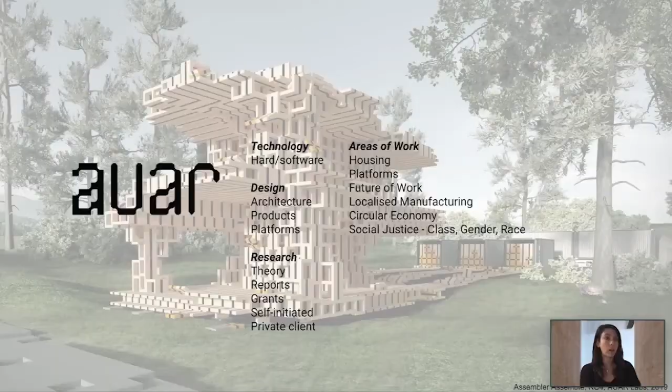One of our primary mechanisms for automating architecture is an approach, and some might call it a disciplinary project, that is referred to as the discrete. The discrete approach is a radical rethinking of the parts that make up buildings. Instead of architectural parts being constrained to types like column, floor slab, beam, or staircase, we think of them being made of parts similar to the zeros and ones in code.

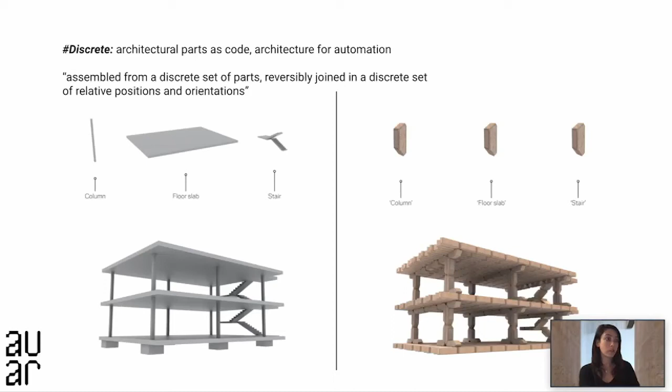Now, this is based on principles of digital materials, a concept drawn from mechanical engineering. Digital materials have been defined by researchers, such as those at the Center for Bits and Atoms at MIT, as assembled from a discrete set of parts, reversibly joined in a discrete set of relative positions and orientations. What this enables us to do is reduce the number of different kinds of parts in a building, but also increase the capacity for spatial diversity, and therefore the ability of a discrete kit of parts to respond and adapt to the needs of local contexts without increasing costs or supply chains.

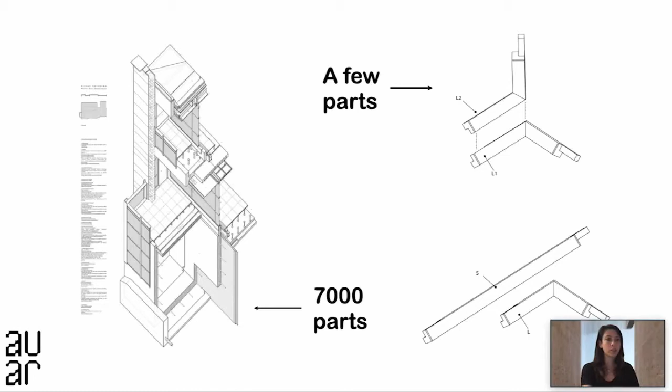Now, this is part of a framework for production that sits in critique of the notion of modularity. That's a result of the increasingly industrialized production processes of the 19th and 20th century. It's also a critique of the mass customization found in the digital architecture of the 1990s and of the early 2000s. Now, modularity at the scale of an apartment or a room unit, for example, does not enable the kind of universality that a single discrete part allows, in that the same modular unit cannot be used for all structural or spatial configurations. And while the parametric paradigm achieves near infinite variety, it requires costly and lengthy production chains.

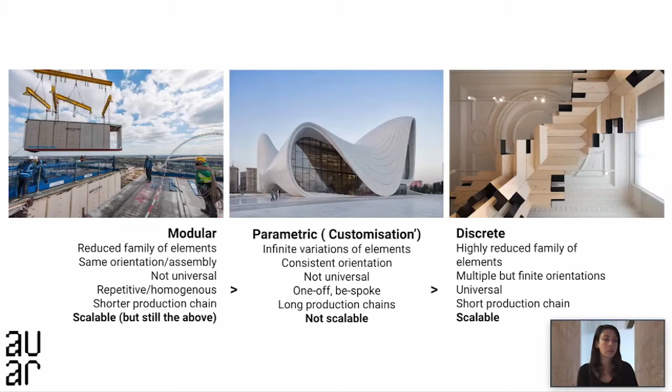So the discrete uses the tools of parametric customization and serialized and modular mass production, but localized geometric differentiation. So we reduce building elements down to a highly reduced family of elements that can achieve multiple but finite orientations. Importantly, the discrete enables a scalability that neither paradigm can achieve. Higher or lower resolution is possible using the same combinatorial logic, in this case to construct a column and a floor slab.

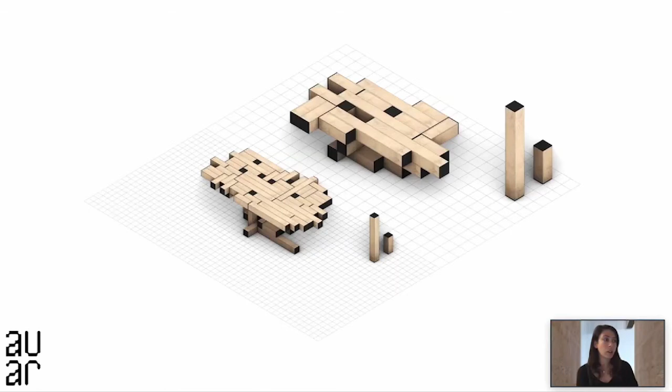Now, what we see this doing is enabling an architecture that is entirely digital. Discrete architecture is also perfectly made for automation. For example, digital fabrication technologies such as CNC milling work best when the same part or the same kind of part can be repeatedly cut out of sheet material instead of customized parts, which also enables us to reduce a significant amount of waste. In this case, for our block type A discrete housing system, one sheet of plywood equals one discrete building block.

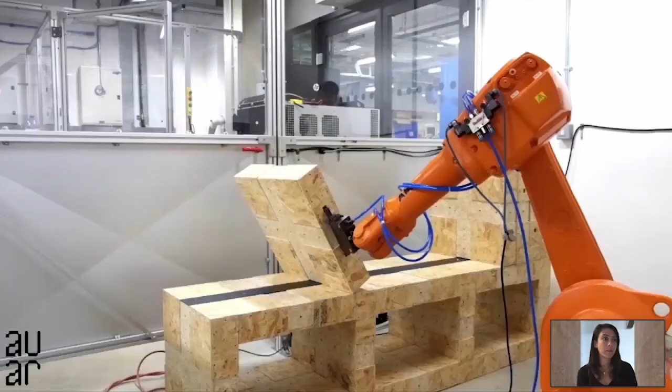Similarly, industrial or mobile robots capable of building also really like repetition in assembly. They work best when they do the same or extremely similar tasks over and over, rather than having to be entirely customized in terms of their behavior or their tool paths. We've referred to this in our work as the notion of discrete automation.

Now, we're currently not alone in recognizing the capacity for architectural production to work better for automation. Architecture as a discipline was a relatively early adopter among the design disciplines of digital tools, and there's a really rich history in architecture of taking on new electronic and digital technologies that dates back more than 50 years. Yet construction remains one of the least digitized sectors globally, with a significant automation gap, and it's only slightly more digitized than hunting.

Furthermore, as many people watching this will know, construction has a significant labor shortage, and productivity has flatlined since the middle of the 20th century.

Now, the automation gap is both the lack of innovative solutions in construction automation around changing social practices and a lack of innovation and creative thinking for supporting existing knowledges or trades within local contexts. This has created a situation where technological innovation emphasizes the bottom line, and efficiency is favored over people's lived experiences, their knowledge, and their expertise.

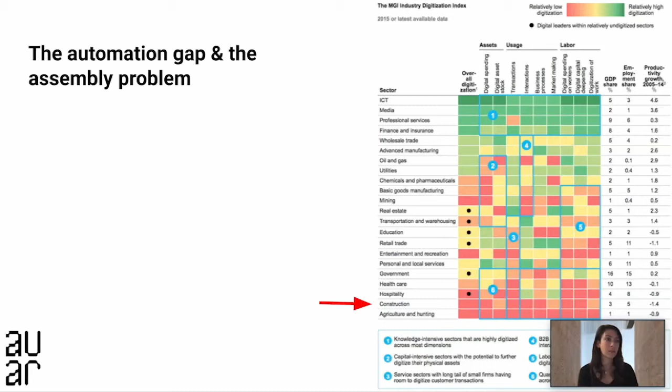This then helps achieve a better streamlining of production chains, addressing what has been referred to as the assembly problem. And the assembly problem is the inability of existing approaches to automated or digital design strategies to reconcile effectively with existing building practices.

Now, in our book, Robotic Building, published almost a year ago, we expanded on this, creating a larger discussion around what we called robotic building, putting it in the context of the age of automation. It also attempted to rethink the hierarchy of authorship. For us, it was an embodiment of our ethos as a practice and a lab, questioning the role of the single author.

In the book, we defined robotic building as the utilization of automated technologies to realize architecture. But unlike research on automation that has occurred previously, this did not place robotic building only in the context of digital fabrication or digital design. We began to identify the impact that automation has had and will have for processes of production and architecture in the built environment, while also extending our argument towards new understandings of how relations between architecture and social practices might be transformed entirely by automation.

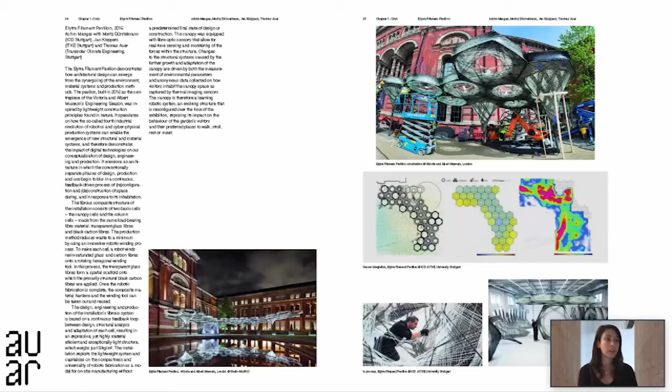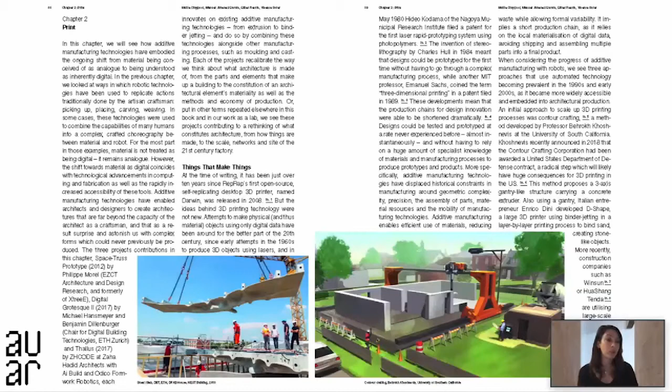So while the industrial robot arm is one such instantiation of automation and architecture that the book examines, the understanding of automation presented in the book argues for the dissolving of traditional notions of architectural syntax, an argument embodied in the discrete. Chapters follow themes such as craft, print, assembly, many, and diffuse, and include only realized projects led by the top researchers in robotic building internationally.

So what we do in the book is recognize that digital architecture, the result of a more conservative and neoliberal approach to technology, has tried to play innocent in its fetishization of technological and formal innovation. But automation is not at all innocent. It immediately forces positions and questions about what increasing automation would mean for society. For example, do we all need universal basic income?

Who owns robots? What jobs remain? What kind of housing will we live in? Will we all live in WeWork-like housing?

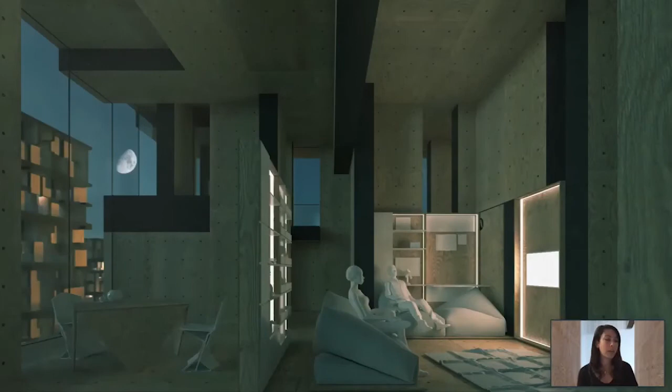There are deep cultural issues within architectural production that really highlight the incapacity of our current disciplinary practices to adapt to these questions. Yet when we use the term automation, architects are suddenly able, or really even forced, to think about these issues of labor, platforms, data, bias, discrimination, jobs being lost in new kinds of rust belts, and about control and ownership.

So we need to then rethink practice and how projects are delivered. In this case, our projects are homes. People live in them. When given the opportunity, it is evident that people do want to have some agency in how their homes are designed and made, not just how they live in them.

People don't just want to have the choice about paint color and countertops. So we need to rethink the ways in which those in positions of power influence the way that the built environment is designed, produced, and lived in.

Today, existing power structures must change if we are to shift to a society that can cope with the social, economic, and ecological changes that we as a culture and society need to deal with.

So in AUAR, what we do is advocate for horizontal, participatory, and equitable social practices in architecture and technology, where individual autonomy and freedom of individuals is supported in a structure of care. And what we have seen is that this leads to more creative, inspired, and empowered people, and I hope more just built environments, homes, and communities.

So how do we bring tools of production to people? How do we put them in the hands of people? How do we rebuild trust in such a striated industry? And how do we empower participation in a way that isn't extractive in terms of value or superficial in terms of meaning? How do we leave our 'I'm the expert' or 'I'm the one with all the knowledge' idea at the door when we work with communities?

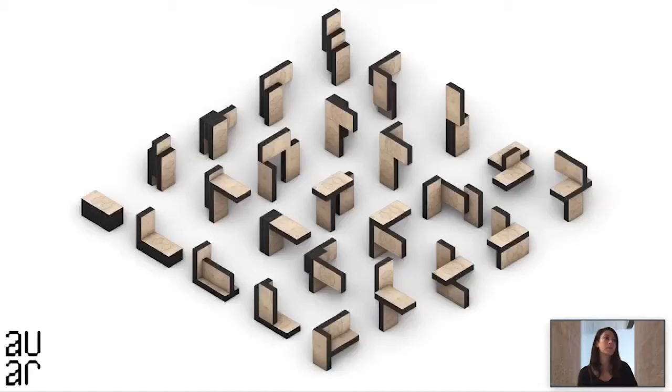Discrete parts in our projects are combined with easily accessible fabrication technologies, such as CNC machines, for off-site manufacturing of parts, as well as an on-site manual system of assembly that uses off-the-shelf tools and doesn't require any specialist training. Now this aspect's really important because it enables multi-generational building.

In one of our most recent builds, we had local residents aged 12 to 76 as part of our building crew, and in another, 16 to 18-year-olds completed 2 weeks of work experience with us.

We have also created a web-based design app in-house that allows for real-time collaboration between groups, using simple rules to communicate what is possible or impossible using a discrete system.

This was developed through a co-design process with local residents as part of a larger project around the implementation of a value-centered approach for the deployment of discrete housing systems, funded by Transforming Construction Network Plus, as well as partially by Southwest Creative Technology Network. It also, importantly, requires no specialist software, only a web browser.

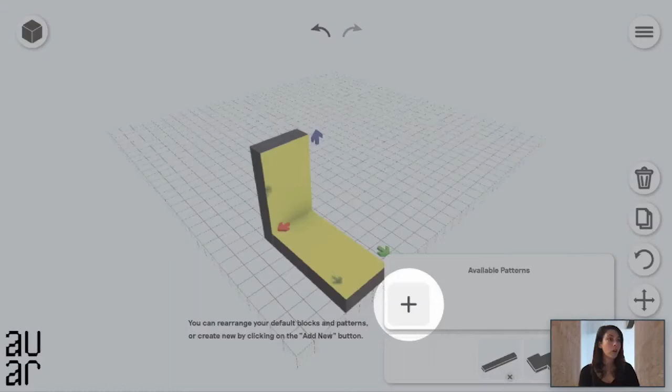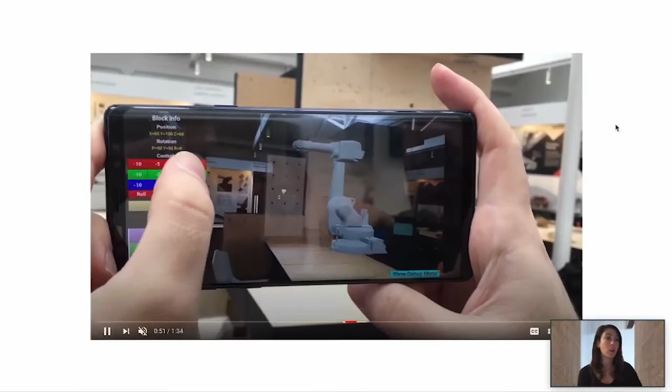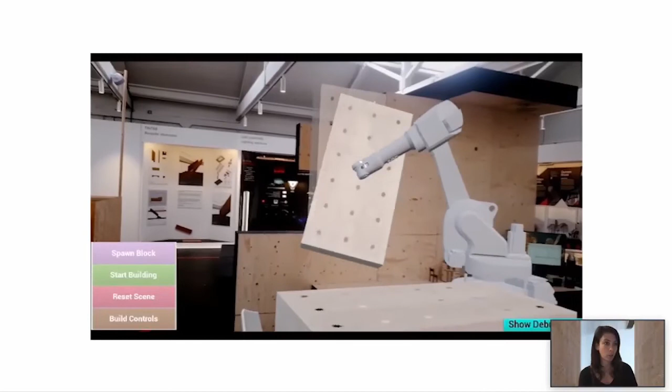Now, other co-design tools that we're working with include an augmented reality application that enables real-time instructive assembly for on or off-site locations. Throughout this year, we have been testing the use of both apps with two sets of community members who are either local residents of the projects we are working on or work in the trades, and both groups have been people working as crew on our building projects.

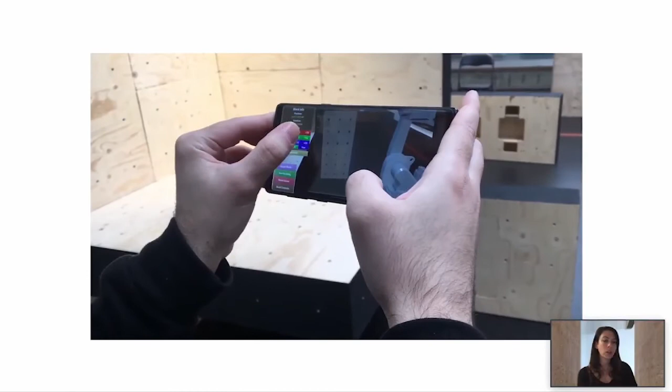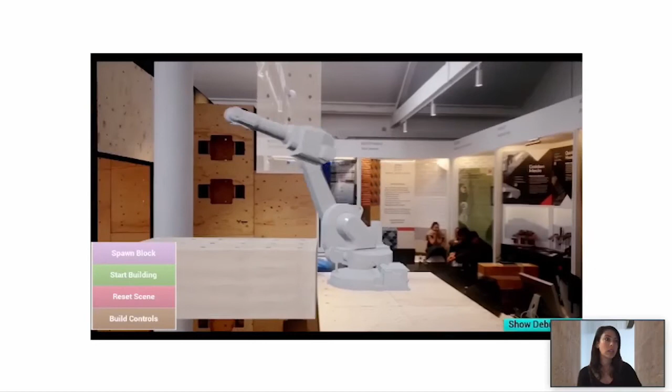So the apps are really the first step in an ecosystem of tools that will expand to include platforms for tension networks and robotic control. And what this allows us to do is to incrementally automate workflows and construction processes while preserving the kinds of knowledge and labor within the communities that may use them or be affected by their increasing use.

Recently we have worked with two communities in differing ways by taking the approach that instead of partnering with large industrial partners, we would partner with community groups and government. Both are hugely disadvantaged by the status quo in that there is a huge lack of trust on the one hand and an inability to really take risks on the other.

In the case of Knowle West in Bristol, we partnered with a community-led digital arts organization called Knowle West Media Centre, as well as their digital fabrication hub, The Factory. I'm going to wrap up with some images of this project in a minute.

And in Hackney in East London, we have been working directly with the council's regeneration team, as well as a network of partners that include cultural organizations, dance companies, theater makers, participatory artists, local colleges and youth groups, and future leaders programs, both in Hackney and in the bordering council of Waltham Forest.

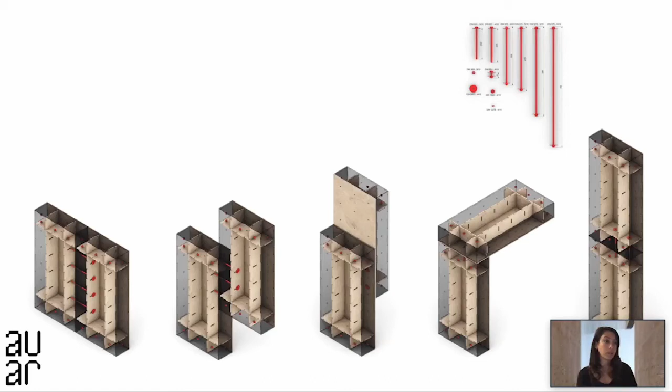Now, in both cases, post-tensioned timber building blocks are used as the main building element. These are, as you may imagine, based on principles of digital materials and enable the reversible assembly of a structure. The timber blocks are secured by using steel rods inserted at predefined repeating connection points and are post-tensioned. The repetition of the timber elements alongside the post-tensioning generates structural integrity at almost any scale.

The build of the project in Knowle West Bristol, called Block West, captured the very end of a 6-month development process in the local community, where community members joined our crew, were paid a living wage to participate, and went through, alongside us, a deep investigation via, of course, the pleasure of Zoom due to COVID, into their homes, their community, and what kinds of spaces and homes they wanted, needed, and desired.

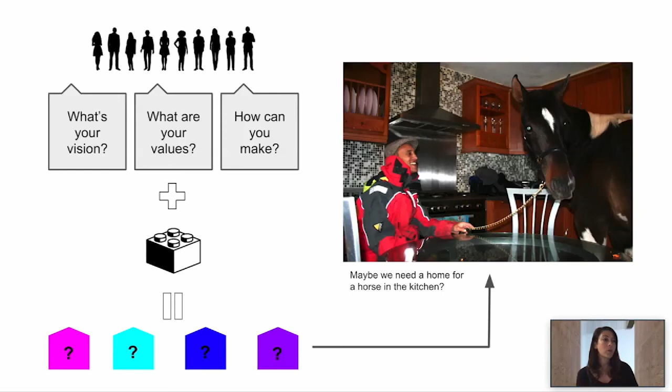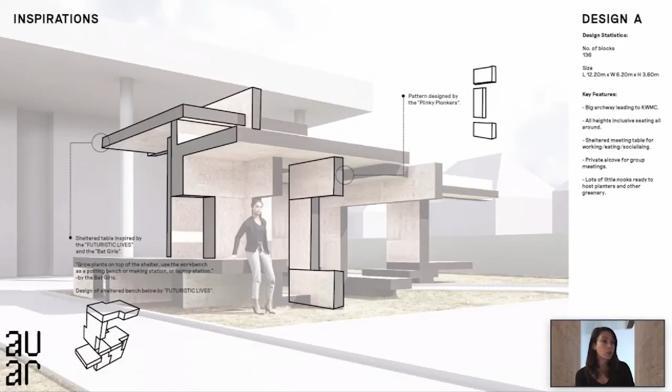So it became incredibly important for us to show how rethinking frameworks for automation can generate the tangible and the physical. How witnessing this shift from the virtual to the tangible can embody a complete rethinking of who holds power. How it can begin to enable a culture of adaptation and resilience that holds at its core the impact that change has on communities.

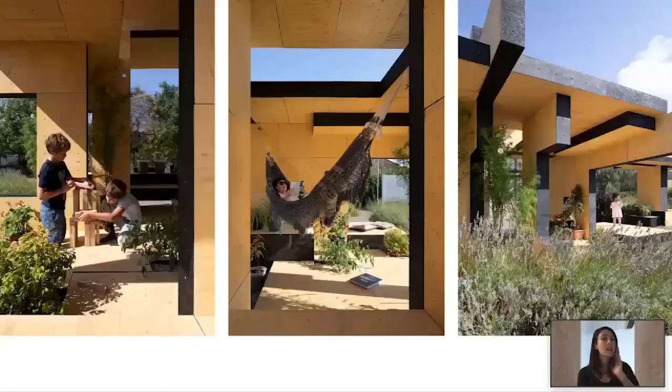What it demonstrated is that when people can identify what they contributed to a design, they can begin to start unpacking the notion of single authorship, the notion of the expert, the notion of us versus them.

And it became so important as a way to show us how we can really construct and frame ways of working that gives an ability to reestablish trust and care in communities.

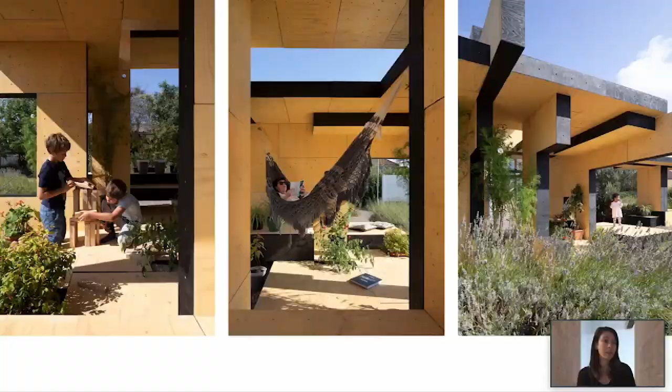So while Block West is a prototype for automated housing using a discrete housing system, it was contributed to by a huge network of individuals living in Knowle West and in Bristol, many of whom have now discovered new potentials for themselves that they didn't know that they had.

So in the end, really, what it is a prototype for architectural production using automation that can be used for building homes, but it is also a prototype for building community, for building creative adaptivity, for contributing a shared and evolving sense of place and placemaking that we hope can be scalable.